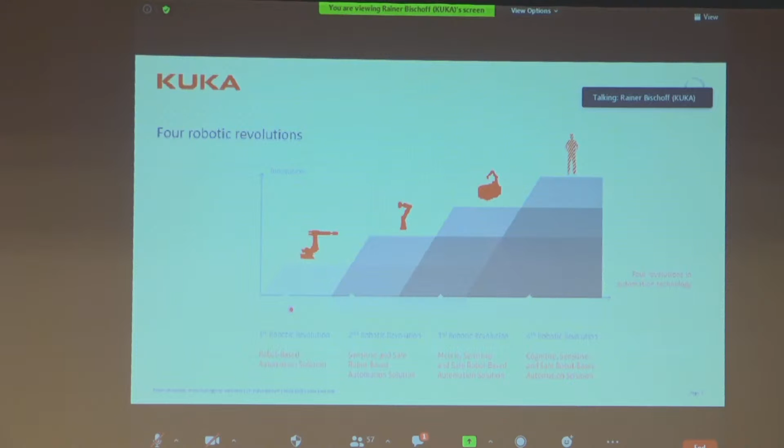What we are doing in these research projects and towards productization can be very well depicted with the 4 robotic revolutions, as I try to coin this. These are 4 robotic revolutions, not to be mistaken with the 4 industrial revolutions. The first robotic revolution is simply when it all started, robots helping to manufacture goods, so robot-based automation solutions. Since approximately 2010, we are witnessing the second robotic revolution, where robots are no longer behind fences, but are becoming more sensitive and safe so that they can work without fences.

In the third robotic revolution, we add mobility to such robots. And the fourth robotic revolution even comes with cognition. I will go into more detail on all these 4 robotic revolution steps in my next slides, so that you can have a better understanding.

But maybe to summarize the first 3 steps under one umbrella: these 3 steps can still be manually programmed. These are still automatic robots, while at the 4th step, we see more autonomy in the robot technology. So automatic versus autonomous, this is again a huge gap, which still needs lots of research to get realized. But coming to the first robotic revolution, robot-based automation solutions, you're probably all aware of this.

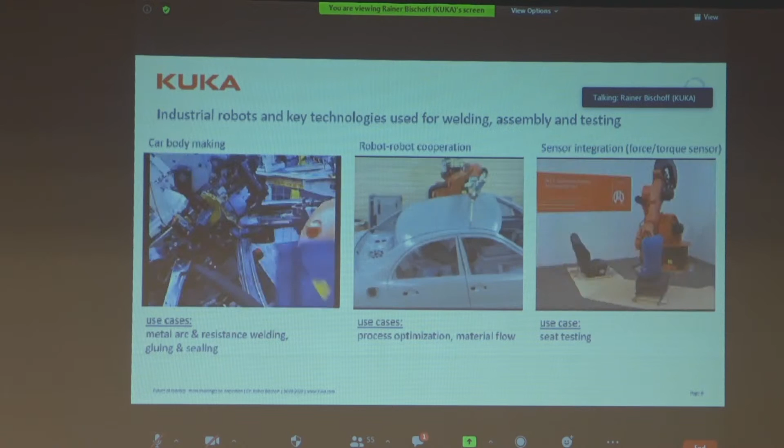On the left-hand side, you see use cases in metal arc and resistance welding, gluing and sealing. Here is an example of BMW manufacturing. You see our big industrial robots all behind fences. They're all stiff, dumb and numb, blind, and they need fixtures for the parts to get high precision in production. Here you see a robot doing spot welding. These are very classical processes, and 99% of the body-in-white production of today's cars is automated like this.

There's another good technology which is called robot-robot cooperation. And here you have use cases in process optimization and material flow, where, for instance, 2 robots are holding one workpiece, or one robot is holding a workpiece and another robot is performing a dedicated operation on this, as you can see here in the picture.

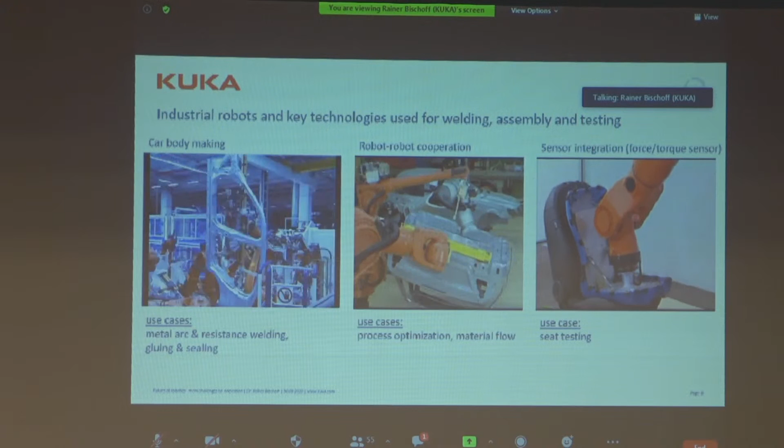And to the right-hand side, another key technology used in these kind of things is sensor integration. What you see here is a robot used for seat testing. This robot has a force torque sensor at its flange and is imitating or emulating the entry and exit and the typical motions of a human body on a car seat, and thereby testing the car seat. So these are all typical robot applications and technologies for the first robotic revolution.

In the second robotic revolution, we add the term sensitivity and safety. And I would say a very good incarnation of the second robotic revolution is the KUKA lightweight robot. It has very unique features, such as gravity compensation. Gravity compensation can be used to use torque sensing and good models of the robot to only have very little forces needed to push the robot through its workspace, for instance, for hand guiding and for teaching operations.

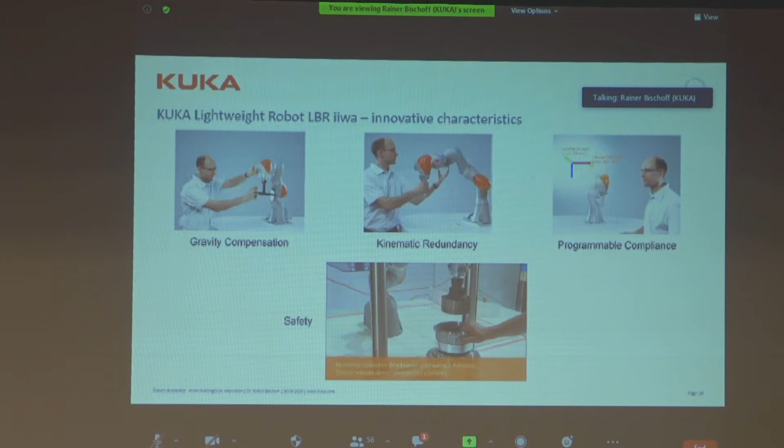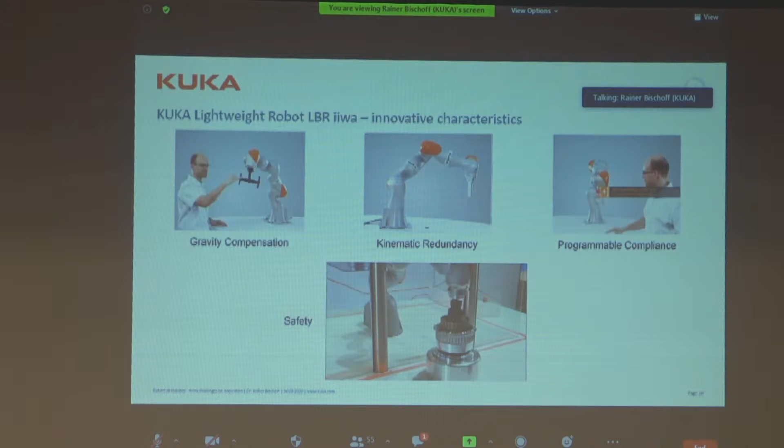The second feature of the robot is that it has 7 degrees of freedom and not only 6, like most standard robots. So it means it has an elbow, very much like a human arm, and therefore can be employed like human arms, for instance, in assembly tasks. And the third feature, which is important, is a programmable compliance, which means that I can make the arm stiffer or more compliant depending on the task at hand. And it is very interesting to combine these three features on the shop floor today.

And what is needed then on top of that to make it really applicable and that such robots are able to work without fences is safety. So we have diverse measures inside the robot arm, like redundant encoders that enable us to detect forces that are not expected and then to stop the robot, but also to exert forces like the inserting of a gear into a box if the forces are needed. So here again, you see the very difficult situation of clamping, which is prevented by the robot system.

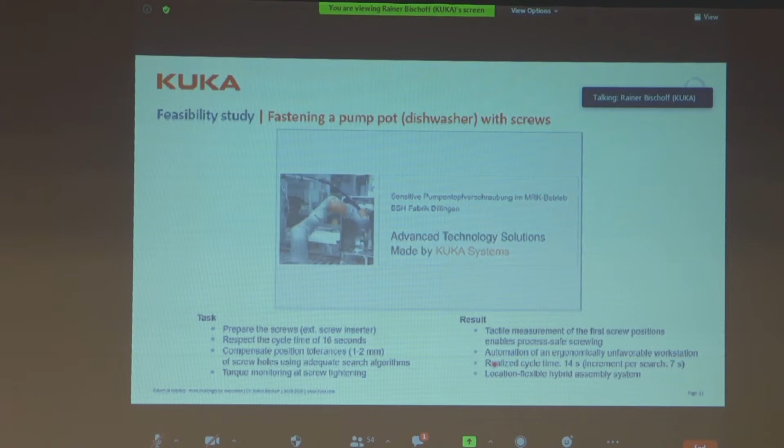And to give you a glimpse on the use case, this is the fastening of a pump pot of a dishwasher with screws. It's one of our many feasibility studies that we have done here with Bosch Siemens Hausgeräte. You see how the robot is on a mobile push cart. It is being fixed to the location, but then still the robot has to calibrate and register itself with respect to the work object and to the production line. This is done in the first step.

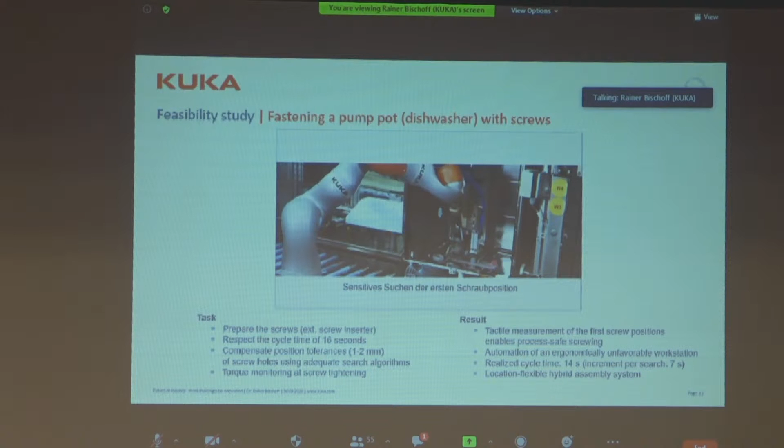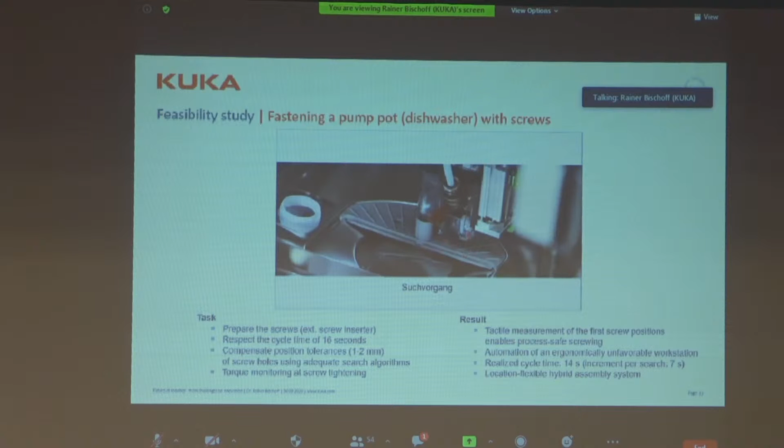And then the task of this robot is to fasten a pump pot. So this is a plastic part here in the middle of the housing of the dishwasher. It has actually 4 screw holes, and the robot has to fasten these screws. And since this is a plastic part, it's never really lying 100% at the same location, so the screws have to be actually searched for. And with the sensitivity of the robot, you can use it to find the screw hole and then to insert the screws.

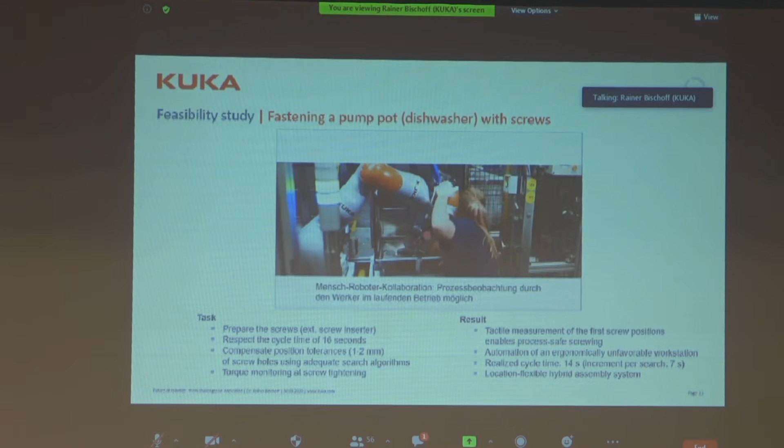The process cycle time that was given to us was 16 seconds. In the end, we were able to realize 14 seconds, and only if the robot had to search intensively for the hole, this was then extended. What is also necessary to look at is the whole automation chain of these kind of automation problems, for instance, the feeding of the parts that you need, in this case screws. And another important topic is, if there's a problem, a human always has to come in, stop the robot by touching it, and push it again to restart the procedure. So this is where human-robot collaboration really makes sense at the production line.

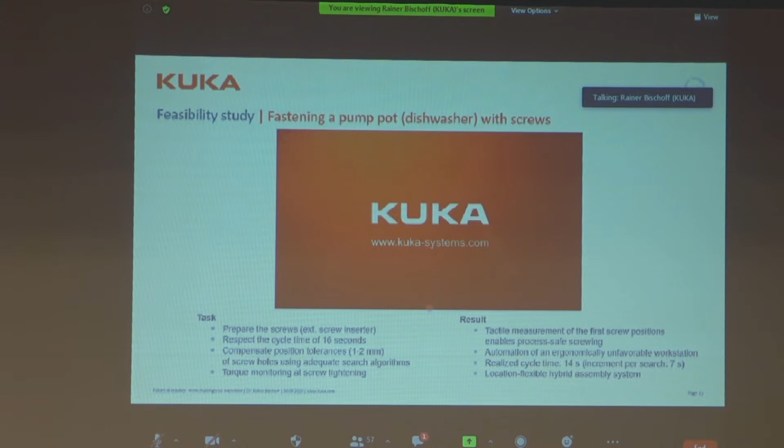Coming to the third robotic revolution, this is when we now add mobility to the otherwise stationary arms, and it's getting more complex here. So you see this already from the design of our mobile robots, from very small robots for education and research to very large robots with several tons of payload. But they all have the same principle. They have these mecanum wheels, which allow the robot platforms to move omnidirectionally.

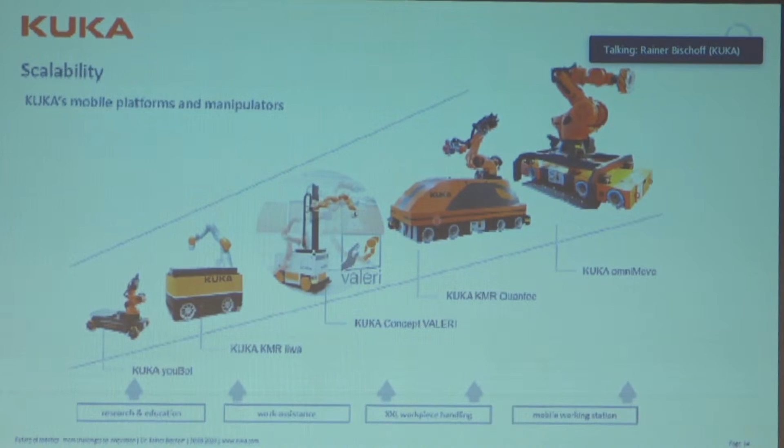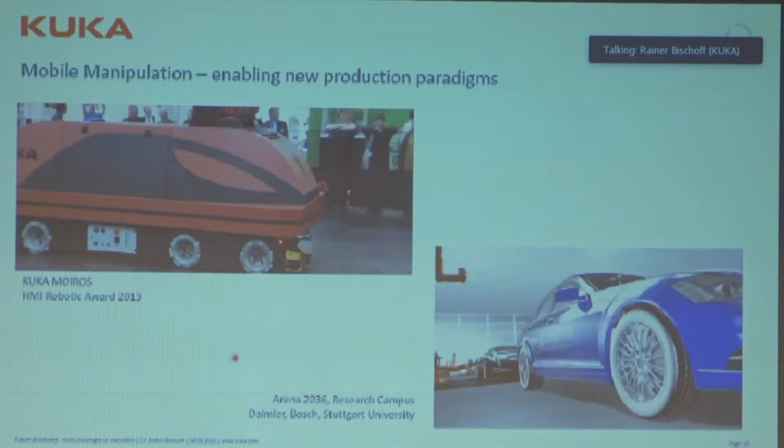And here you see two examples. One example from Hanover Fair, where this robot actually has won a prize. And this is a large robot which is able to work on large work pieces. So a single robot arm would not be able to polish the whole windmill structure. But if you have a mobile base underneath the robot arm, you are able to polish the whole structure. The navigation is done based on laser scanners, based on maps. This is today technology which is commonplace.

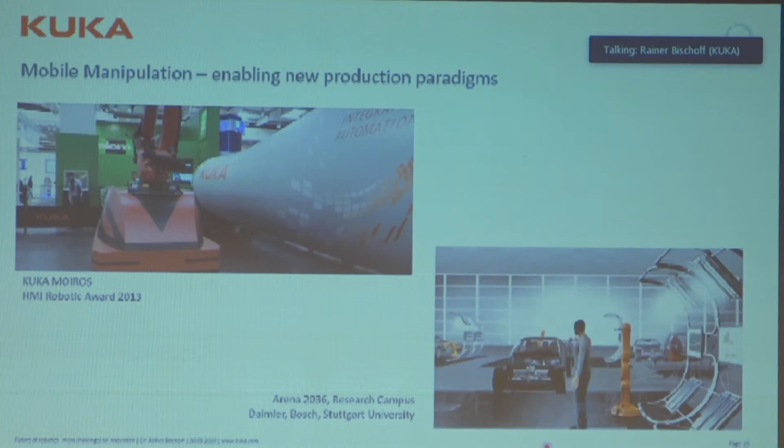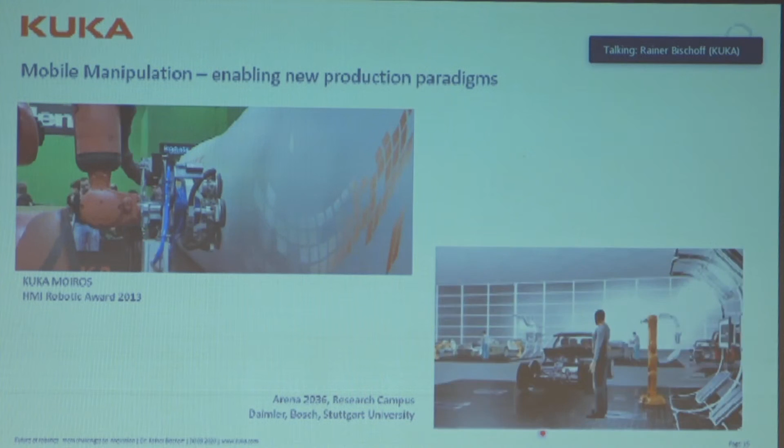But if you further want to look into the future, to the lower right, you see a picture of Mercedes-Benz, Daimler, Bosch, Stuttgart University in the Arena 2036 project. This is how they envision car production in only 16 years from now. So you have lots of mobile manipulators running around the shop floor, collaborating with humans, and you have many different cars going along the same production line, all manufactured by robots. Of course, this is a vision.

Then you do not only combine the advantages, but you also harvest some of the disadvantages which result in technical challenges. And the first one is, of course, precision. If you add a mobile base to a stationary robot arm, you get uncertainties, the inaccuracy of the platform. So you will never be at the same location where you have probably taught a special task.

Safety becomes a much higher problem even than just with stationary arms, because you add a mobile platform which cannot be behind fences. You have uncertainty in the environment. The environment is constantly changing because humans are also in that environment, which requires navigation, planning, environmental models. System complexity is rising significantly because you add some degrees of redundancy.

You need other control methodologies for true mobile manipulation, so that you can manipulate objects while you are moving with the platform. And you have to think about how you can actually operate such systems. How do you program them? Modularity becomes an issue also for maintenance and repair and for scalability. System integration becomes a much bigger problem in terms of software architecture, sensor technology.

System pricing, of course, is a topic. No one is paying for a feature that is not needed. So if you have a mobile manipulator, you really have to make use of the mobile platform and of the robot arm, and performance as such becomes an issue. You will also see this in the following video.

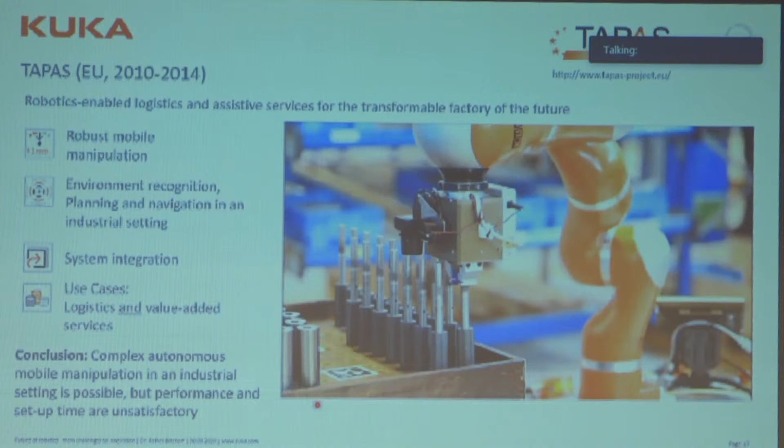This is the result from a research project that we have been doing together with Grundfos in Denmark. Grundfos is the largest pump manufacturer in the world. And here you see a few parts of these pumps, which are being moved on the shop floor from A to B, from where they are produced to other places where they need further production steps. And in this particular case, we have a mobile platform with a robot arm.

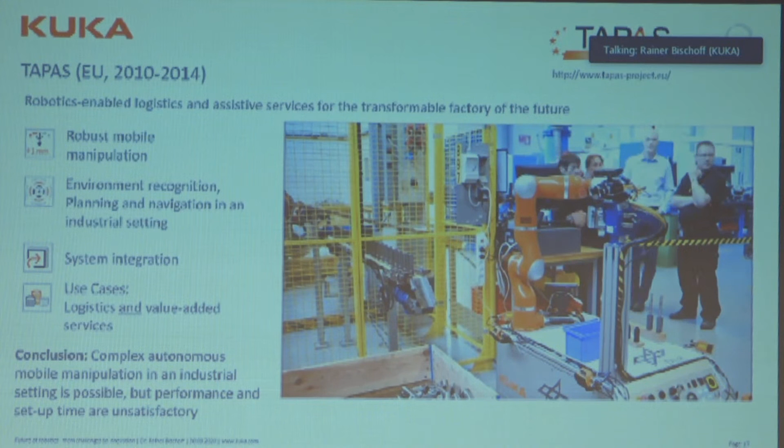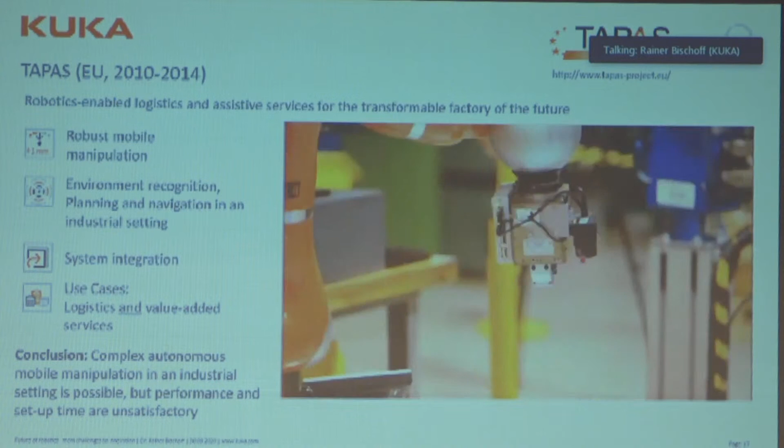This platform also has two stereo vision systems on pan-tilt units. And with these two stereo vision systems, the robot is actually modeling its environment. And at each location, this model is updated and the robot is planning its path in this three-dimensional environment. And only by doing these regular updates is the robot really able to perform the intended tasks. Here you see it can also manipulate other equipment mechanically.

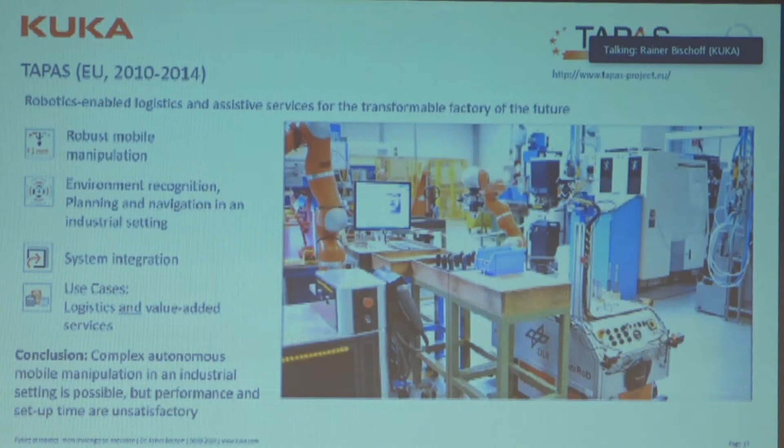Navigation is done with the two laser scanners, the two yellow items you see at the bottom of the robots. Navigation as such, I mentioned it already, is, I would say, a solved problem on the shop floor. Despite this environment, which is not specifically prepared, navigation is something that can be reliably done.

What will always remain a challenge is that once you have arrived at the workstation where you have to perform your task, you will never be there at the same location. So you have to register yourself again with respect to your environment, and you have to use vision systems or other sensing systems to get an environmental model.

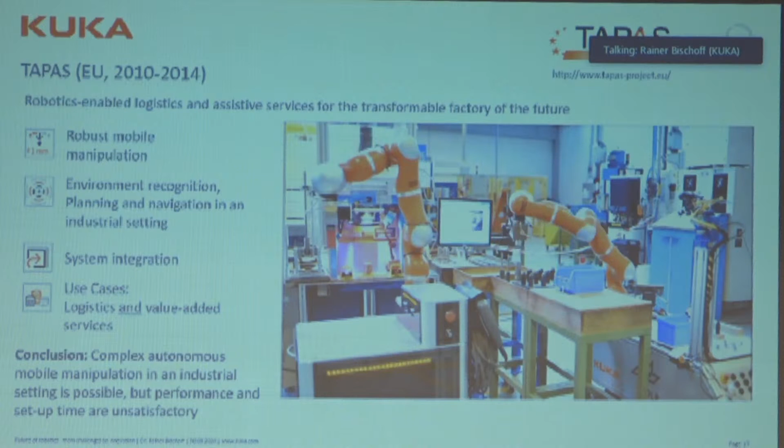And what you see here in this particular sequence of the video is that the robot is planning and replanning its path time and again to perform this operation. Also because the workspace is kind of limited, and workspace limitation means limited in the workspace of the robot, not in the workspace of what we as humans normally think of as workspaces. So this becomes clear if you look at this video now.

This is a small load carrier which has to be put on the platform of the robot, and it's a rather complex path that the robot has to take in order to put the box on the platform. This is the shortest path in terms of automatic path planning, given the environmental models for the robot, because the robot is performing this path planning in joint space and not in Cartesian space.

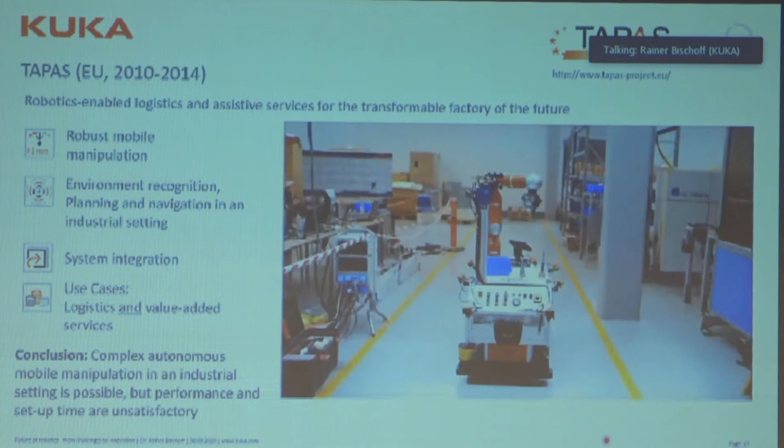And it results also in rather funny motions, which are not predictable by humans, which again poses a problem of safety if humans are around. And this is something that we still have to take care of in our developments.

Another problem that you have probably noticed by looking at this video is the speed of operation. So the video has been accelerated by a factor of 8. And only with this acceleration by a factor of 8, somehow we like to look at this video and think, okay, this is kind of good performance.

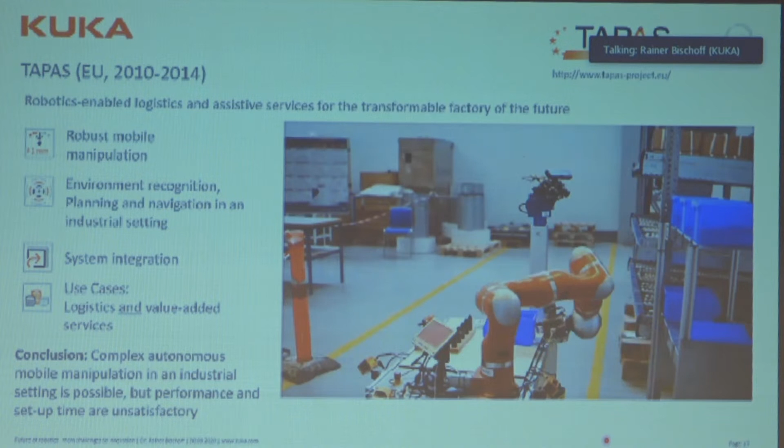But it's also a huge challenge to increase the speed of the actual robots to get human-like performance. And this is also one of the challenges that we are still facing. So not to have slow robots and accelerate the videos, but accelerate the robots and show videos in real time.

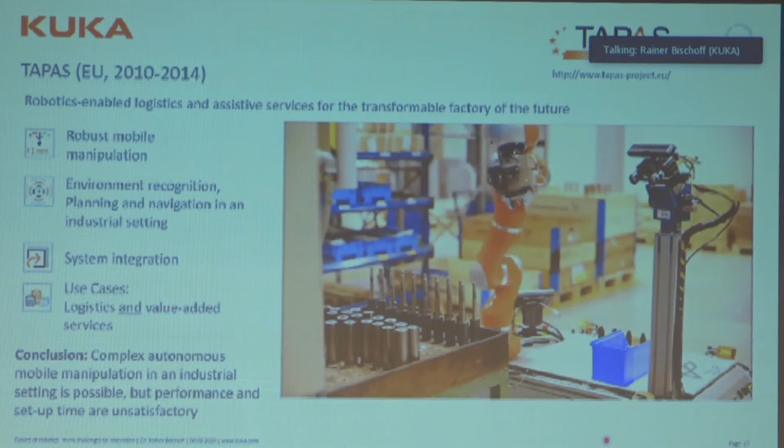Okay, coming to the fourth robotic revolution, as already said, this is where we add cognition to the whole topic. And cognition, as a definition, is the mental action or process of acquiring knowledge and understanding through thought, experience, and the senses, from the Oxford Dictionary. So this applies to humans. If you want to speak in terms of machines, it's called AI.

So if you just think in terms of AI, maybe a good example is a chess playing program. There's lots of chess computers out there that are able to beat a human world champion in chess. But if you look at a 6-year-old child that is able to get a box from a shelf, open this box, take out the chess figures, set up the chess figures, and then start playing chess, this is the kind of physical AI which is so important nowadays.

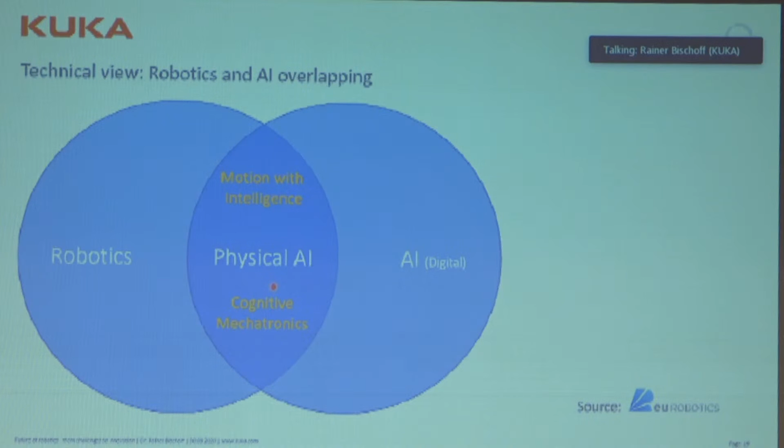So you have to combine artificial intelligence with the robots, and only then you will be able to manipulate things in the physical world. So not only play chess on a theoretical level with a computer, but have a robot that is able to perform physical manipulation in the real world. So to move based on some intelligence, or you can also call this cognitive mechatronics.

And then there's still maybe some confusion between symbolic and numeric AI. Definitely robots need both in the future to take intelligent decisions, because they have to take decisions based on experience and/or knowledge. And experience is gained by learning. Here deep learning is one subcategory of machine learning, which is a subcategory of numeric AI. And the knowledge has to be represented for the robot, and then you can reason on that knowledge. This is the whole area of symbolic AI. So both are needed to make robots more intelligent and autonomous.

And where robotics actually meets AI is depicted here on this slide. Starting here on the top, all the vision technology, Google, Microsoft, Amazon, they all have vision technology that is now able to detect everyday objects in 2D images. But for the industry, it's still a big challenge to detect objects. This is also a field where AI can help.

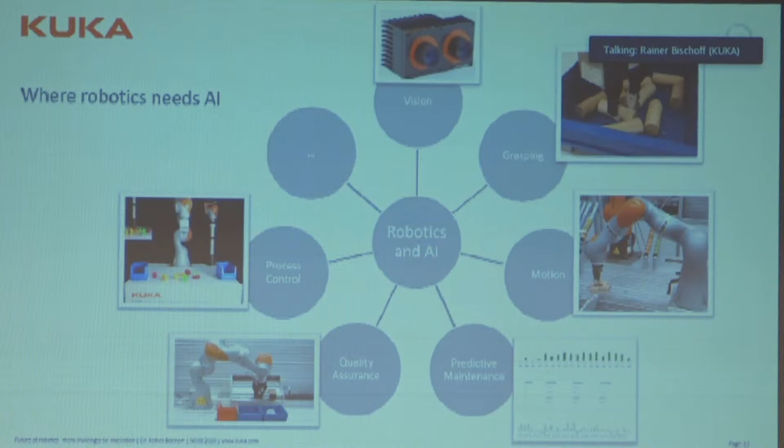But I would like to give one more example in more detail, and this is to have a robot learning how to grasp, because this is very interesting. We have here a 3D camera next to the gripper, and the robot is learning to grasp objects like a baby, so like an infant trying to reach for objects for the first time.

In the beginning of the process, the robot is maybe able only to grasp 1% or 2% of the objects just by chance. But if you let the robot continue with these grasping attempts and have this reinforcement learning methodology, this robot has learned in 35 hours with 12,500 grasp attempts how to grasp objects.

These are wooden objects, wooden cylinders and wooden cubes, and it's also sorting them to the left and to the right, depending on the opening width of the gripper. This is a depth image that is taken.

So no one has ever programmed any vision. Here in this example, the robot has simply taught itself how to do it. So this is really amazing technology.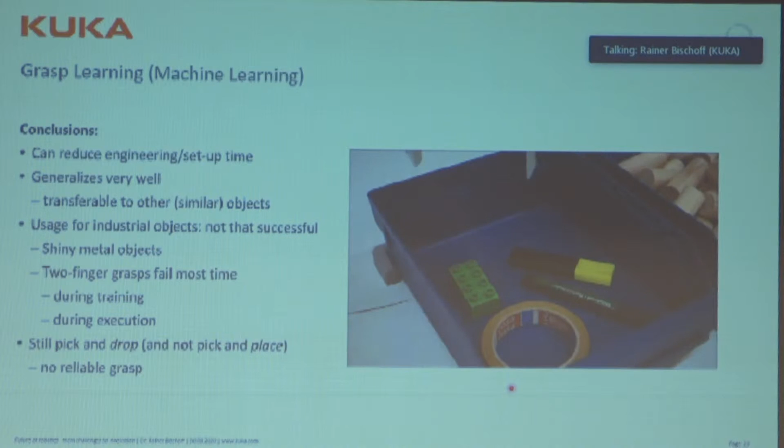And what is even more amazing in the end is that although you have learned this with these wooden objects, somehow the robot is able to generalize over these object categories. So the robot is also able to grasp objects that it has not seen before. The robot has somehow understood what it means to grasp objects from this bin, and is doing this also for different objects.

And to give you an example of one of our funded projects in this area, this is called Hybrid and Intelligent Human-Robot Collaboration. Here, humans and robots have to collaborate on the shop floor in hybrid teams. Here, for instance, in Airbus aircraft assembly, or here in the final assembly of an automotive manufacturer, in this case, Volkswagen.

And you can see in both pictures here, the motivation why we need also robots in the final assembly, which is today not the case. Because the situations where the humans are operating are very unergonomic. Very often you have to carry heavy objects and you have to work overhead, which you can probably only do 10 years on the production line before you are getting shoulder problems. Here's the second example. Working overhead is not such an ergonomic thing.

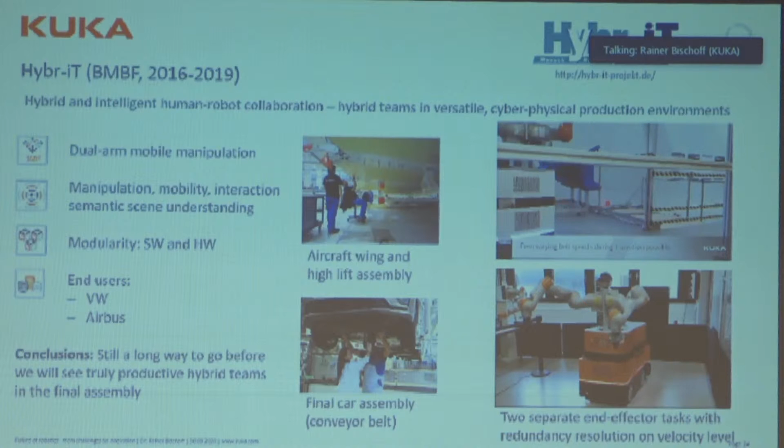And to work on these kind of topics, we have been developing a basic technology, dual arm mobile robot systems that are able to carry out separate end-effector tasks where the redundancy is solved automatically, and also developing technology which is important for the final assembly line, that a robot like this is able to drive onto a belt, to move with the workers and the cars on the belt, performing the operation, getting off the belt and moving back to the front again. So very similar to what the human workers are doing.

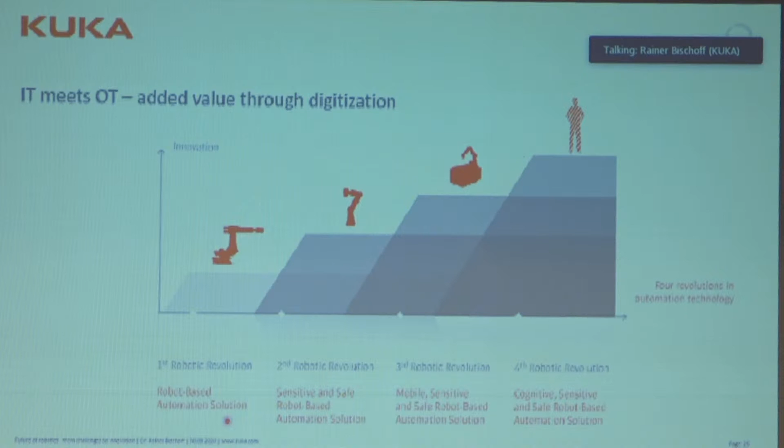What is still a problem and a long way to go, of course, is the communication between the humans and the worker. This is still something which is not yet happening. And finally, information technology meets operational technology. Digitization is helping in all these 4 revolutionary steps to increase the productivity, to increase customer benefits. And that's why I put this here as a bar across all 4 robotic revolutions.

And KUKA has, of course, to also serve this trend of digitization. It's a kind of revolution which is taking place also inside KUKA. We are coming from a machine tool or from a machine manufacturer only building robots and also building, of course, production lines of many hundreds of robots. But now we have to become really a process company.

We have to become a company where the processes and the technologies are available through the cloud, where all robots are connected. And at least we have to offer also for our small customers, not for the big OEMs, they have their own cloud technology. But we have to develop our own cloud technology for the customers who do not have so many robots, but still want to benefit from the digitization.

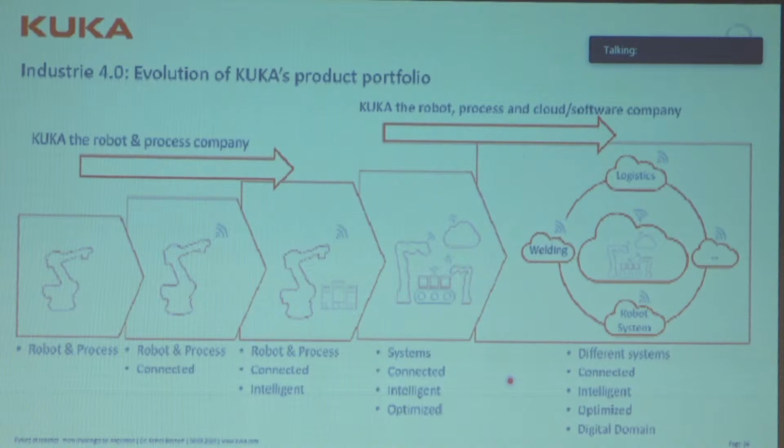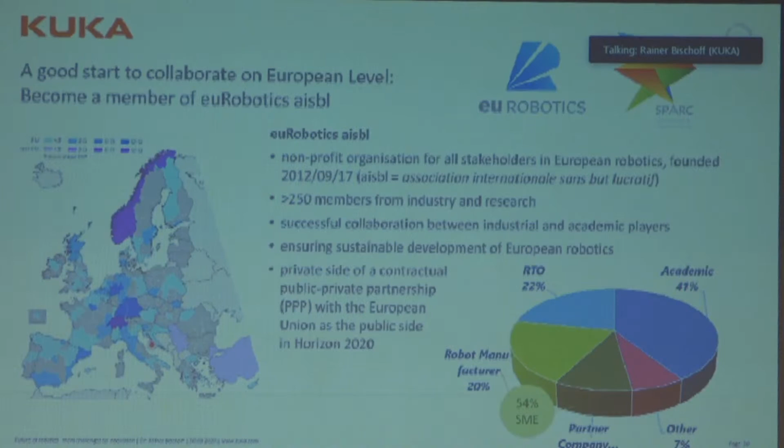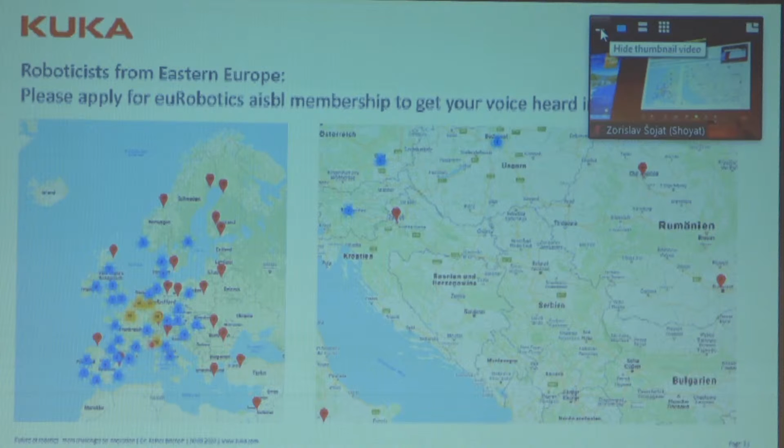Another way to collaborate and start is to look into what is happening on European level. I would like to ask you to become a member of EU Robotics AISBL, which is the representation and voice of robotics in Europe in Brussels. We have more than 250 members, and it's really the starting point of successful collaboration between industry and academia. You see here from the figures how the membership is set up: about 1/3 industry members and about 2/3 academic members. Yesterday night I checked how well robotics from Eastern Europe is represented, and you see here a big gap. I'm hoping many from Eastern Europe are attending this conference, so please apply for EU Robotics membership to get your voice heard in Brussels. There's only Zagreb University here from Croatia as a member. I think this can be very much improved.

Yes, this brings me to the end of my presentation. If you have questions, I'm happy to answer them. Otherwise, thank you very much for your attention.

Herr Bischoff, I think we do have a question here in Opatija for you. Professor Scala, the microphone is yours. Yeah.

Dr. Rainer, it was very nice, thank you very much for this very deep and extensive overview. Any questions? I don't hear anything at the moment. So if someone's talking to me, I'm sorry to say I cannot understand you. Can you hear me now?

The oldest one is called teleoperation, one mode of control where the loop is made very fast between a user that manipulates a master arm and a slave arm that executes the task at a distance. Meanwhile, through a screen, the user can see the image captured by an imaging device. So the distance can be quite high, but the slave arm that does the task is under full control of the distant operator. This is the first implementation of collaborative robots.

A second one is realizing the task at the same location, so the robot and the user are now at the same location and they collaborate mechanically to do the task. We call that co-manipulation, and that can be done in a parallel fashion where the robot and the user both manipulate the same object and the forces add. It can also be done serially, where we have a combination of movements in series. And we also have exoskeletons and orthoses.

Today I will talk about two main medical applications of those collaborative devices. One is for so-called laparoscopic surgery, and one is for prosthetics.

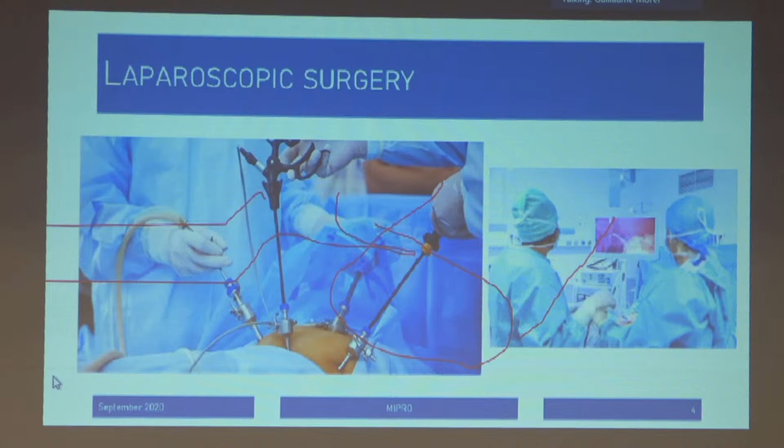That surgery is quite efficient, but we know that it's quite difficult also for a surgeon to do complex operations, and the application is often limited to small, simple medical interventions, whereas it could have benefit if used for more complex operations. So you probably heard that robots have been introduced in the US for at least 20 years, and the main robot that is used is an American robot. It's called Da Vinci, and Da Vinci can perform teleoperation inside the patient.

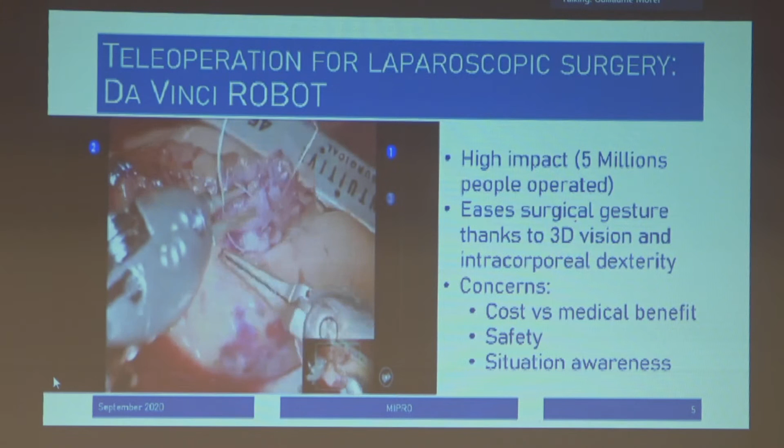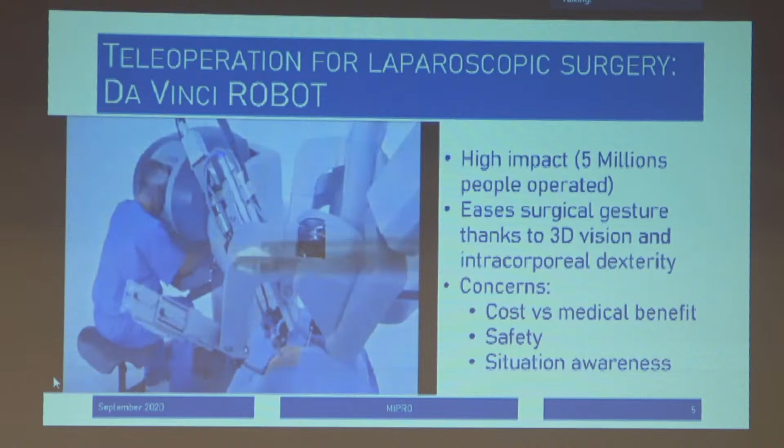So the instruments that you see here are inside a patient. The arms manipulate the instruments from outside the patient, and the surgeon is at a console. It has a master console to control those instruments. It has also a 3D view and all the control of the instrument flexibility. This is, in reality, by far the most successful robot so far in the medical field. And it has been used for millions of operations all over the world.

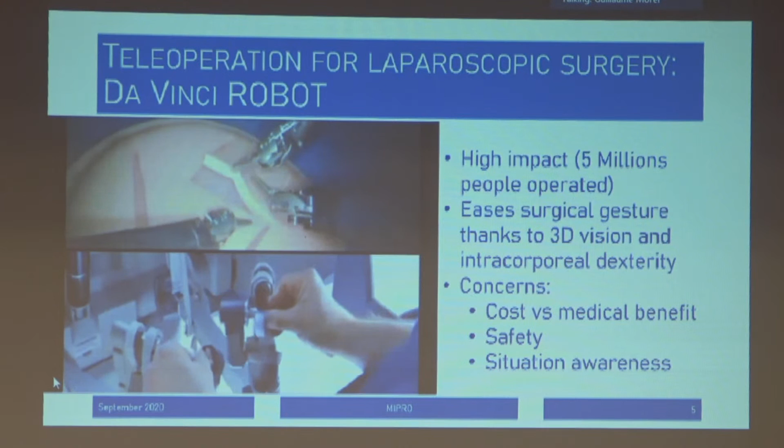However, today, we know that we have a few concerns about that paradigm. One is that the cost is quite high. The safety is also an issue because, in fact, there is no force feedback on the side of the surgeon, so the surgeon doesn't feel the forces that he applies. Rather, he can only see the movements of the instrument, but only the distal movement of the instrument. So the rest of the movement of the robot is not under the survey of the surgeon. And we call that a problem of situation awareness. He's not aware of the whole situation, he's only aware of the tip instrument location.

So to cope with this problem, there is more and more another paradigm that has been developed, and this is the concept of co-manipulation. So in fact, instead of having a robot that does the whole operation and a person that is at a distance to control the robot, we want to mix mechanical movements, robotized movements with human movements all together on the site with the patients.

So mechanical attempts have been made in the past where mechanical instruments have been fabricated that can be manipulated by the surgeons to provide, for example, inner dexterity inside the patient from outer movement. And this has been a paradigm that was aimed at replacing the dexterity that was provided by the Da Vinci robot, but at a lower cost.

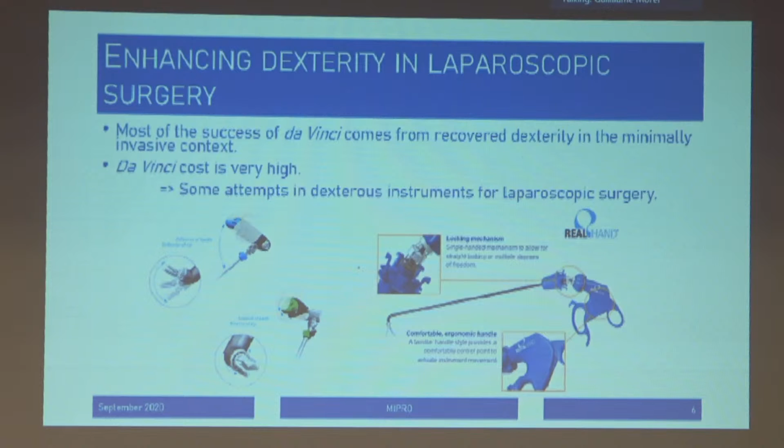So many different attempts have been realized, but the general problem that has been observed with those instruments is that their manipulation is not easy. So the surgeon has a learning curve to understand how to manipulate the controls to do the inner movements of the system that were not intuitive. And if you give an instrument to a surgeon that is not intuitive to use, well, the surgeon simply does not use it. You know, he prefers to refer to the old instrument. One quality of the Da Vinci system is that its manipulation is very intuitive.

So how can robotics help to solve that problem? Well, instead of having mechanically coupled instruments, we can imagine having robotized instruments where the distal movement of the instrument is controlled by small actuators, and these actuators can be mapped into whatever control of the human system in such a way that it becomes intuitive. It's not constrained by mechanical relation mapping between hand movements and distal movements. So we have, for example, studied that problem, and to do so, one interesting concept that can be used in modern robotics is what we call virtual prototyping.

One problem that we had in studying that question is that we want to fabricate robotized instruments to do surgery. The problem is that prototyping a real instrument with several degrees of freedom within a 5 millimeter diameter rod is quite a long and complex task. Now, if we design one robot and we want to test at the end whether its use is intuitive, it's very long in terms of time and the cost is very high in terms of research and development.

Meanwhile, we can fabricate virtual prototypes, meaning that the prototype does not exist. We just fabricate a handle with buttons, and these buttons control a video game. And the video game is the virtual instrument, in such a way that you can give the instrument any different kind of movement or mobility that you can imagine. It's very rapid to develop one. It takes 1 day instead of 2 years.

And then you can test that with different subjects to see whether the controls that you provide to the user versus the mobility that you give help in doing a task that is representative of surgery. So we have done this, and we went through, at the end, the design of such an instrument, and we were very happy that a startup company decided to industrialize that system, and it's now a commercially available robot.

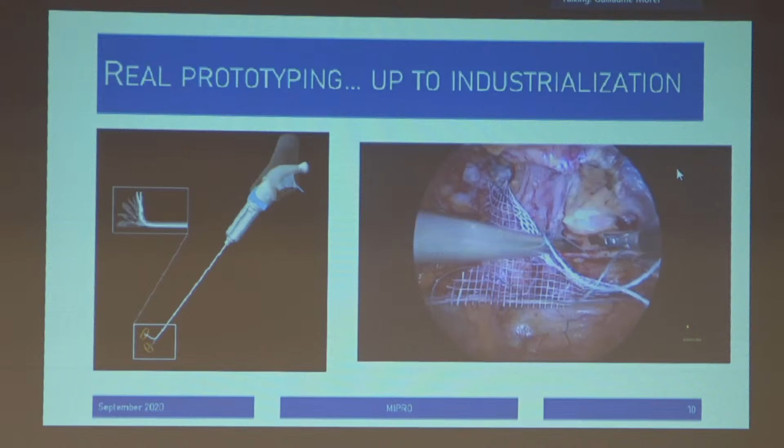So again, it's simply a handheld robot, it has specific controls here that were optimized thanks to our research, a specific mechatronic design to give 2 degrees of freedom that were selected again by our design, and it can perform the surgery with specific motions that are not achievable by standard instruments. I want to say that the price of this robot is 3 orders of magnitude lower than the price of a Da Vinci robot.

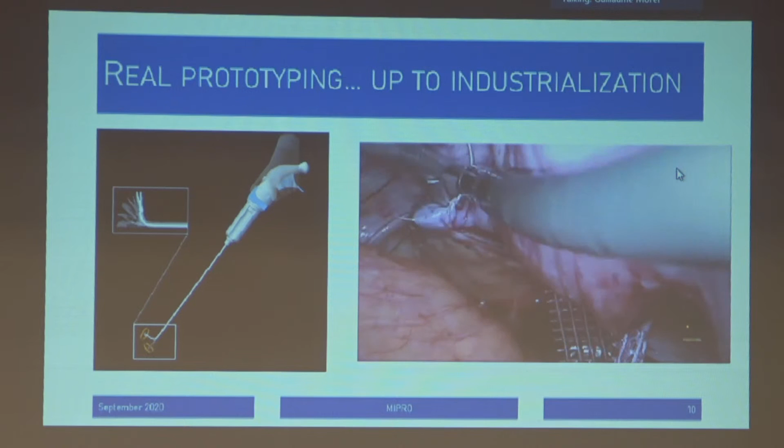Okay, so you can see here the curved instrument and the distal mobility that was implemented on the system. So really we have the concept of co-manipulation, in the sense that the distal movement is a combination of the hand movements and some actuators that were optimally positioned into the system to provide the missing mobility inside the patient.

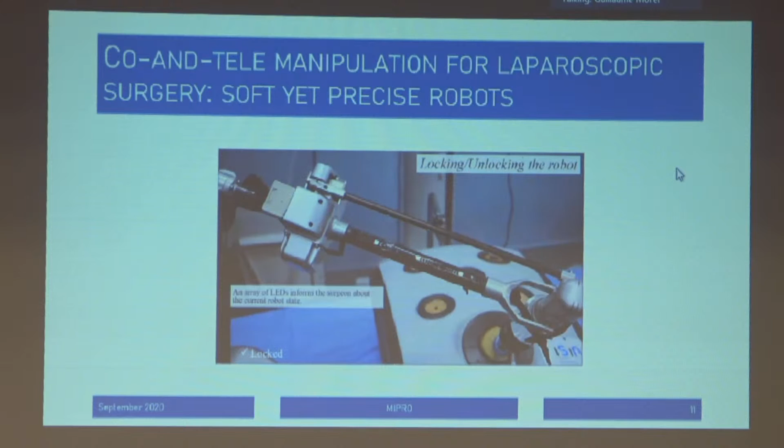Of course, we also have a question in holding, for example, an endoscope. So this is an endoscope that is used for laparoscopic surgery. And we have designed collaborative arms to manipulate this kind of endoscope. So in the previous talk, it was said that the compliance of the system is very important. Of course, we want to have a robotic system that does not exert large forces because it inserts an endoscope into a patient, and we want to avoid large forces being exerted.

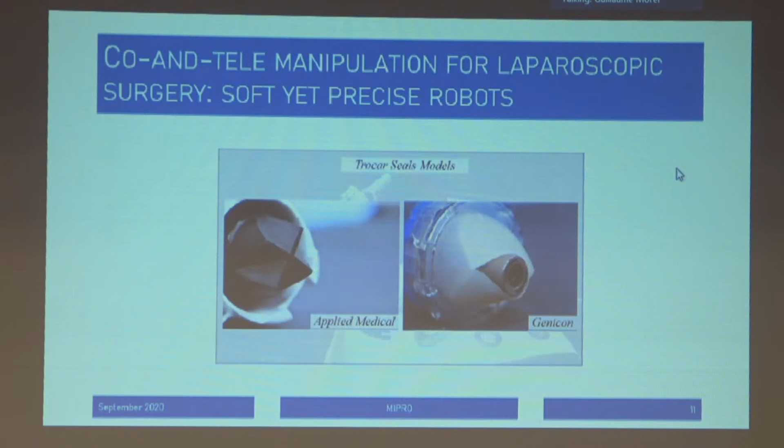So thanks to good transmission technology, thanks to good control, impedance control, which is the same method that is used in the KUKA iiwa robots, we can have a similar behavior with a very high compliance of the system, and yet, thanks to some advanced control, for example, to compensate the friction, we can have quite good dynamic and static precision.

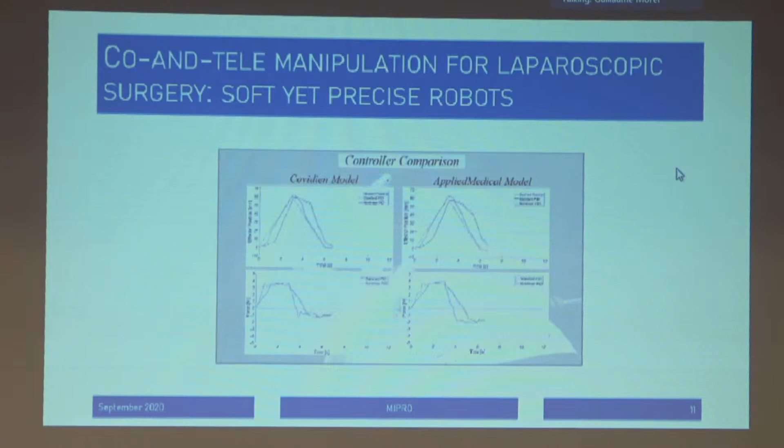Such robots that are used to help manipulation of an endoscope can also help manipulating an instrument. So here you have a surgical instrument, whose tip can be observed here with the endoscope. So you see the tip on the screen on the top left. And this instrument is inserted into a mock-up patient, so with trocars. And whenever we stop moving, the robot understands that it should stay at the same location and freezes the system automatically, locks to that position. And whenever we pull the instrument, the system unfreezes.

So this is Professor Gayet, our surgical colleague, using the same robot here. So as you can see, he's inside a pig. He lifts part of the liver with an instrument that is called a retractor. And whenever the liver is lifted, he just freezes his motion for a few seconds. You will see that. So it freezes, and then the robot automatically understands that it is the correct position. So it will compute automatically the forces that are needed to maintain that liver up and allow the surgeon to use his other hand to do the operation.

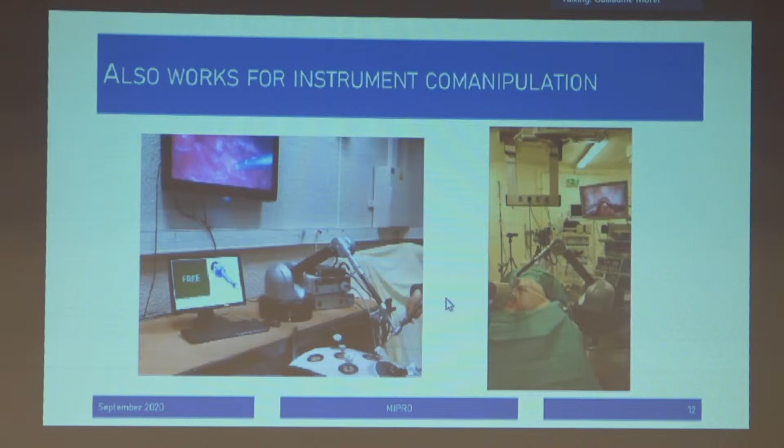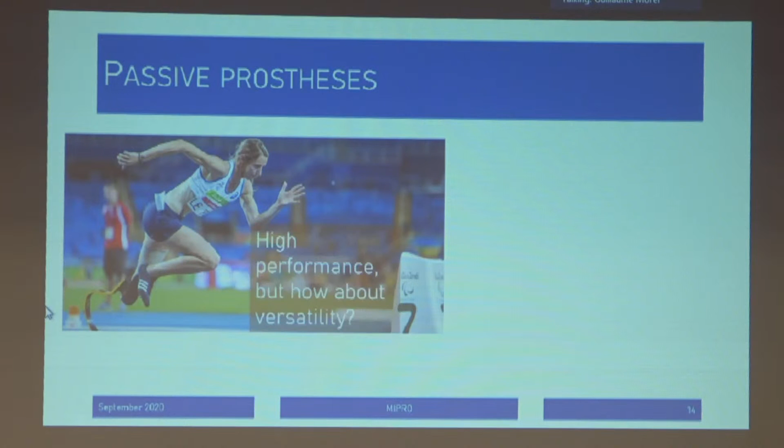Okay, I want to switch now to the second part of the topic, and this is about prosthetics. Prosthetics is another part of robotics today. It is aimed at replacing the limbs of an amputated person or part of the limb. So we know that today most of the prostheses that are used worldwide are passive prostheses, and for example with that runner we have a very high performance. I mean, this runner has a left leg that has the same performance as the right leg when she's running because of the nice mechanical property of this passive device.

So we can reach high performance with a passive prosthesis, but how about versatility? In fact, versatility is very low. For example, that prosthesis has been designed specifically to optimize the running task. But if she wants to do something other than running, like being at home, like walking in the street, like being in a place where there are stairways, they have many different shapes of prosthesis that they have to switch depending on the context.

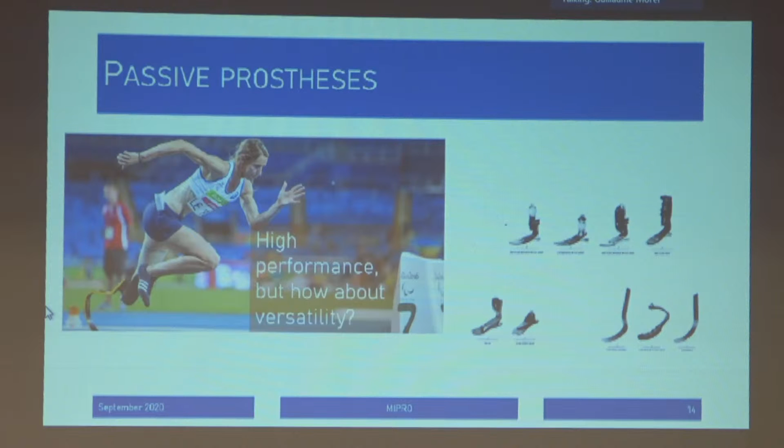Passive prostheses can be optimized, but they cannot be as versatile as a human limb. And this is why robotics, or devices with mechanical mobility, have been used to change the configuration and to adapt to the situation.

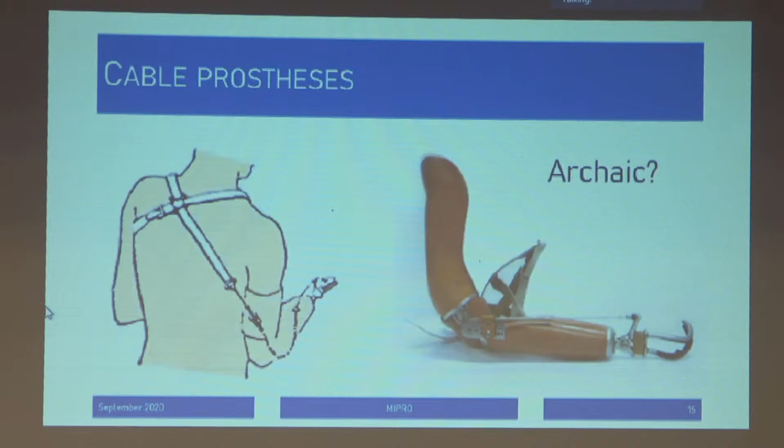So maybe one could think that this sort of device is archaic, but I want to say that it is still one of the best solutions we have. And to show that, I have extracted this video. It's a video that was extracted from a competition for people wearing prostheses, and this competition is called Cybathlon.

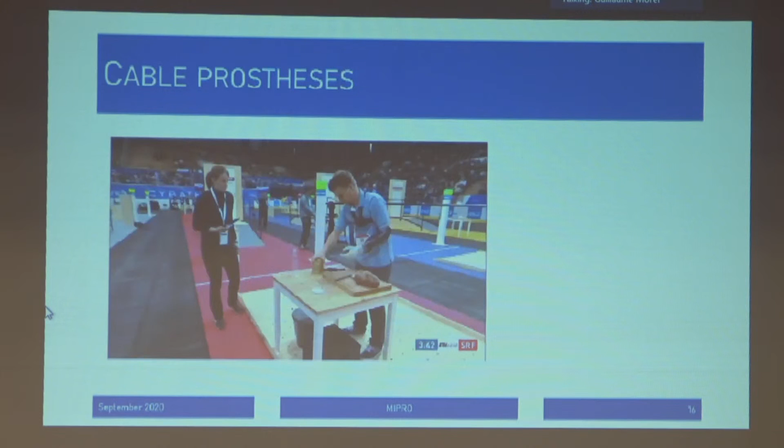So the guy that you are seeing here is asked to do several tasks with his hands, tasks that represent daily tasks. And the champion here won the competition against all the robotic competitors, although his arm is just a simple mechanical arm, the very old version. So with the very old version of the system and only cables, today the performance is better than what we can do with robots. And the question probably is why.

So why can he do this? Because he's very motivated and he can learn incredible skills even with devices that are not optimized, because humans adapt to the system. So this guy is an extraordinary champion thanks to the training that he did with his device.

So the general community is trying to develop systems that are motorized and robotized. One of the most popular ways to do that is myoelectric prostheses. It's a prosthesis that has electrical motors and batteries inside, connected with myoelectric sensors to the human limb in such a way that whenever you contract the muscle, it will move the robot.

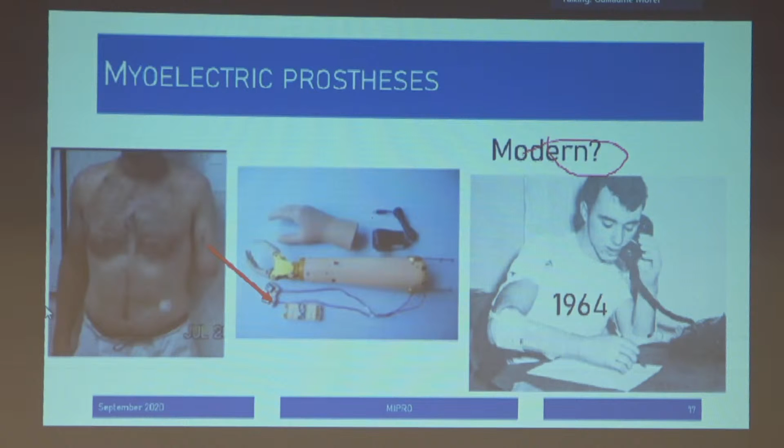If we look at today's state of the art with that approach, it is robotic devices that have many degrees of freedom, in particular multi-fingered hands that you can control to get many different configurations to perform different tasks. But the control itself that you give to the patient is very, very archaic. The control is made by EMG, and it's like a Morse signal.

In other words, what you ask the subject is to give some impulses to the muscles, some digital signal, like 3 pulses will correspond to moving the hand in that direction, 2 pulses and then a co-contraction will correspond to changing the mode. So there are just sequences of contractions that give a set of discrete movements that have been programmed into the robot. Using this to perform tasks requires very long learning today, and most of the time it is too cognitively demanding, and people give up using those prostheses.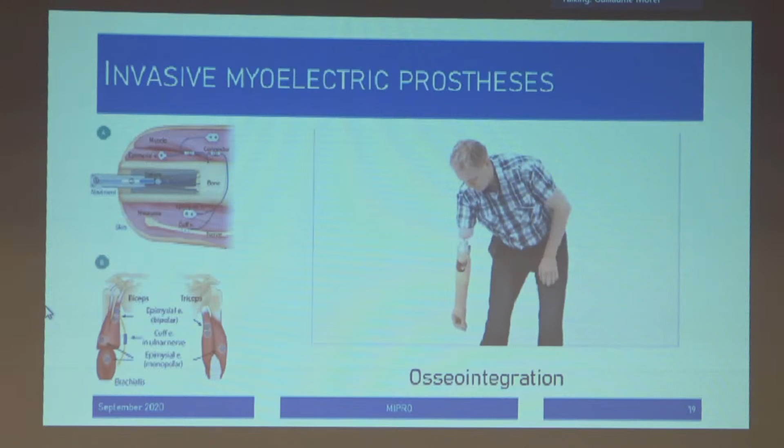So the mechanical solution is fine; the control solution is lacking. One of the reasons is that electromyographic signals are not of good quality, so we cannot interpret them in real time very finely with high robustness. So people try to use different connections and go deeper into the muscles and the nervous system to get a better signal. This is more invasive, but it improves the quality of the signals a bit and allows a little better control. Still, it's not perfect.

So people sometimes try surgery. Here you have an amputee who got surgery, and during the surgery all the nerves were redirected into this area, where you can put a lot of different EMG sensors to measure the activity spread by all the nerves that have been put there. This gives highly redundant, high-dimensional signals, and if you do a lot of learning, you can learn, for example, to move or even to feel things with those signals.

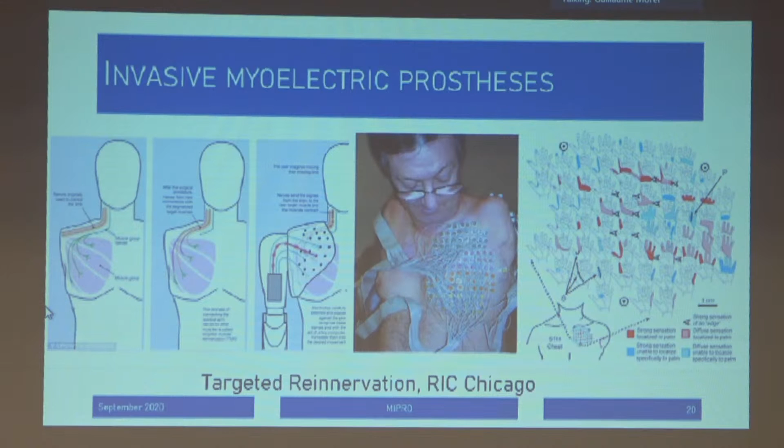So it gives better control, but it's a very tough, very difficult surgery. The success rate is not super high. And again, the learning is so long that it's not accessible to most of the population. So what we are doing here in our lab is trying to avoid long learning by doing a combination of human movements and robotic movements.

And I do that with my colleague, Nathanaël Jarrassé, who is on this picture. And I want to show 2 examples of what we are trying to do to improve the intuitiveness of the combination of human and robotic movements and to help users to use the prosthesis much more easily.

So the first example is using phantom limb phenomenon. Phantom limb phenomenon is the phenomenon that when you are amputated, you still feel that a member is here. The member is not here anymore, but you can feel that it's here. And you can even mentally move it. So if you ask like 80% of the amputated people to move their limb, they can close the eyes and they really feel that they have a limb that moves and they can move it.

Meanwhile, if you ask them to do this and you measure the electromyographic activity here on the remaining part of the limb, you will measure an activity. This activity corresponds to the fact that they are controlling mentally their phantom limb. So what we have done, obviously artificial intelligence is one of the key technologies to achieve this coupling.

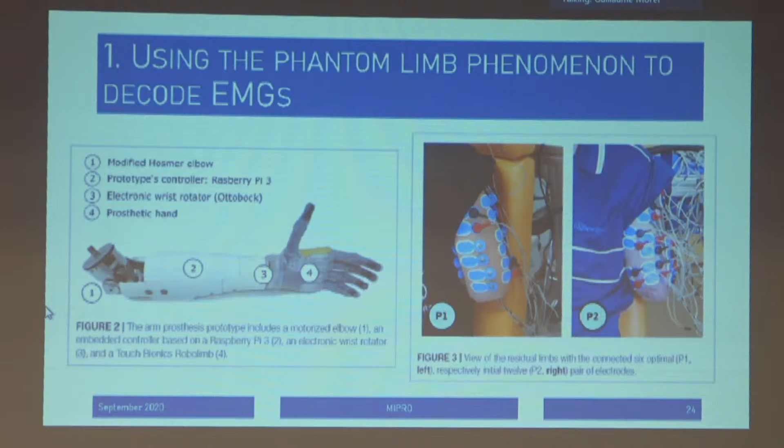Not just asking them to have a sequence that was predetermined, but to adapt to their own control system and their own muscular structure here in the remaining part of the limb. And being able to do so, we do some signal processing and classification, and we were able to detect up to 97% of the correct movement.

So here, the guy that is here, for some technical reason on that video, the prosthesis is not mounted on the patient, but here we are using this to ask the subject to perform that task, which is simply manipulating objects and doing these movements.

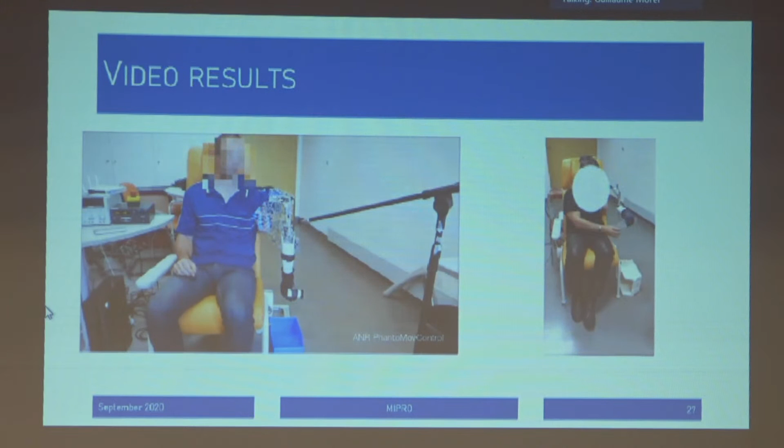You must know that this person was trained for only 5 minutes before that video to learn how to control this. He was just asked to move his phantom limb, then we were recording, we were post-processing those few trials, and we connected directly this. And we had a success rate of 95% only from those 5 minutes of learning. This is definitely how artificial intelligence will help us understand people's movement intention and connect that to robots.

I'm sorry, I'm lost. Here we go.

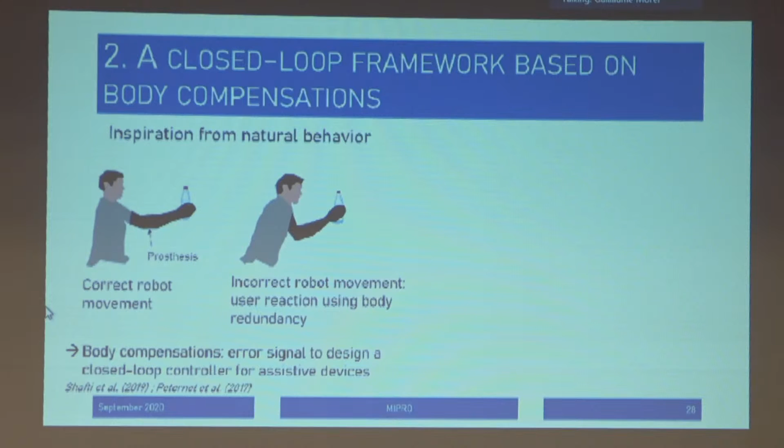Now, the last example I wanted to show is another kind of intuitive control: measuring the reaction of people who wear a prosthesis when the prosthesis is not working properly. So I will go directly to the video that explains. Here you have a subject, and we ask the subject to follow the movement of the robot. So the robot draws a square here in space, and the subject is asked to follow that square with the end effector that was mounted on his hand.

So this is a natural movement. Most people can do that. What is going on?

Okay, now I want to show what happens. We are asking the same guy to do the same task, but we have added a robotic device that this time locks the elbow. So the elbow is always 90 degrees like this. The elbow cannot be moved by the subject. It is imposed by a robot, just like if it was a prosthesis, okay?

And what you can see if you compare those movements is that during the first experiment, the torso stays straight, but in the second experiment, because this is locked, the torso is bent towards the task in order to achieve the task. This is called body compensation. So when the subject wants to do a task and the limb is not working appropriately, the subject naturally compensates with the body to achieve the task.

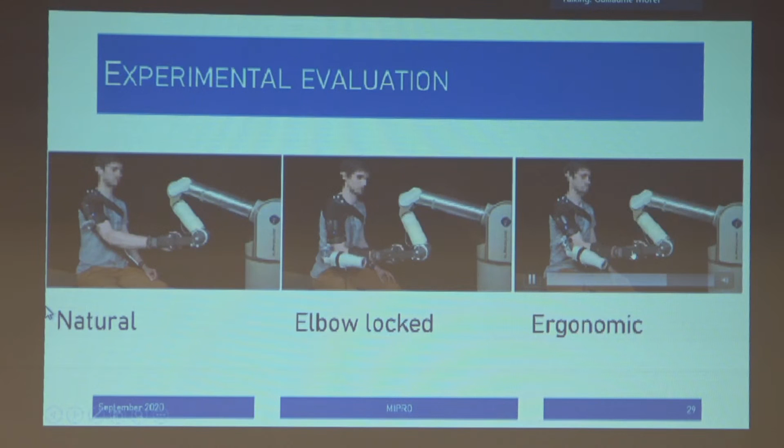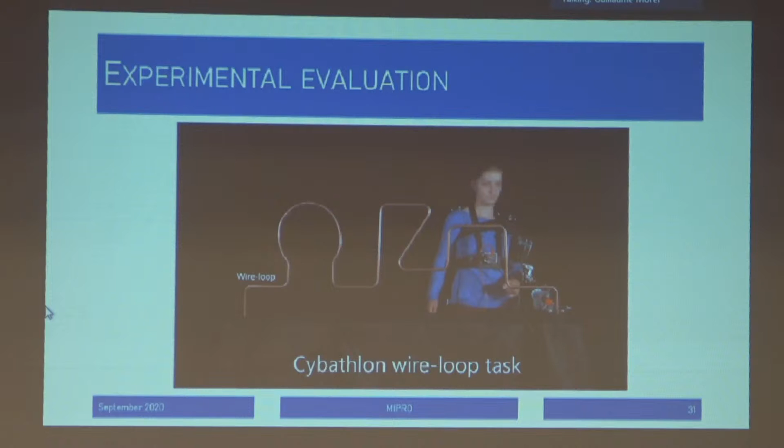And this is what we are trying to do when we try to combine robotic movements and human movements, is that intuitively the robot performs what the subject wants without any specific intention declaration. Okay, so I think I should now conclude. I just wanted maybe to show that other video, which is exactly the same. So if you remember the first video I've shown in the Cybathlon, which will be held virtually mid-November. And one of the tasks is this one.

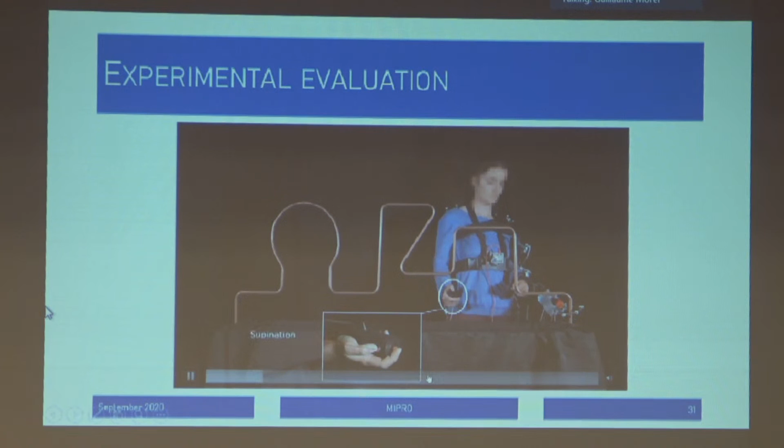So here what is happening is that this robot is moving the hand autonomously, simply measuring the inclination of the user. And the user can do the task without any knowledge of how the robot works. And we have even tried this with public visiting the lab. So we had an open day. All the public could try this, and they were all able to perform the task quite naturally without any learning.

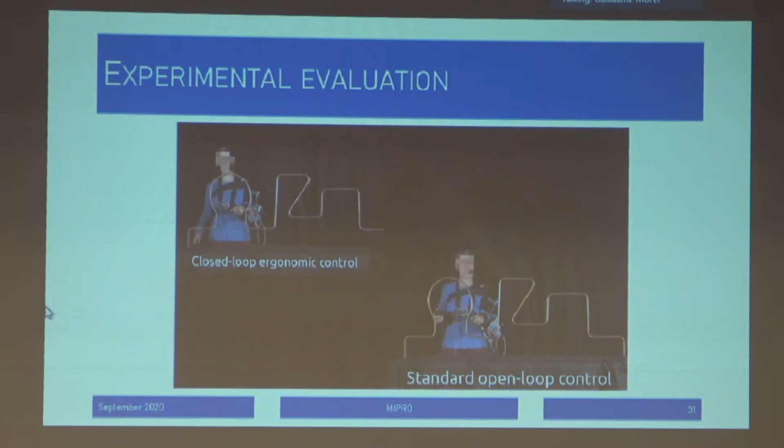Okay, in summary, what we are interested in is combining human motion and robotic motion to realize tasks in such a way that you don't have any complex programming, and that the robot understands the intention, understands what is happening, and adapts its behavior or its trajectory. Okay.

Maybe I can join Rainer Bischoff's conclusion here. The real trend is to have robots that become collaborative because they can have much more versatile tasks to realize. They need to behave safely, to understand human intention. They need to show what they are doing. You need to be aware of what they are doing permanently. And this is quite a fundamental question, because if you want the human to accept the presence of the robot, it must be very clear about the situation.

And we are at the time where we can close the sensory motor loops of the robot with the human, meaning that there is a real-time loop for the two systems. Well, I guess this will conclude my talk. I was very pleased to talk with you.